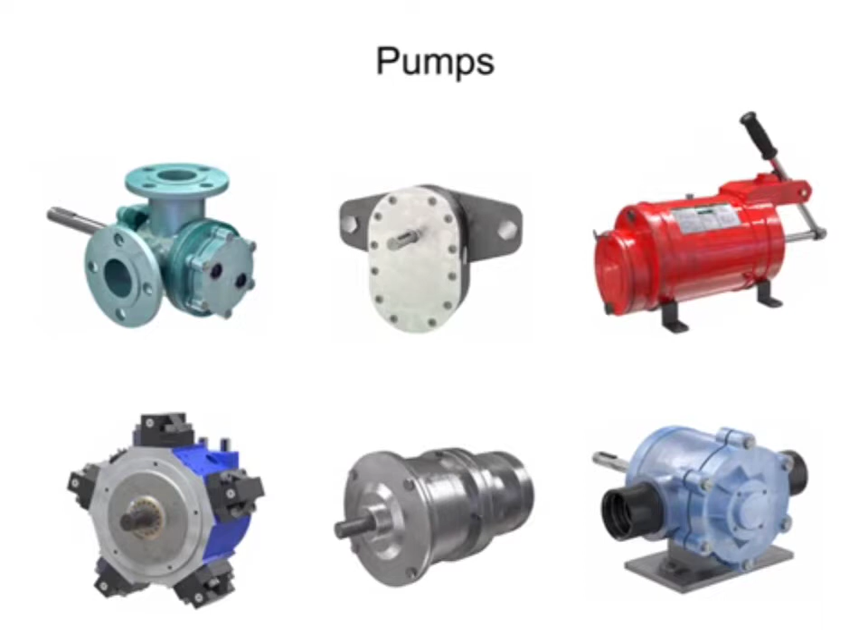Many different types of pumps exist to assist fluid movement in a variety of systems. An external gear pump uses two gears rotating against each other to provide fluid movement.

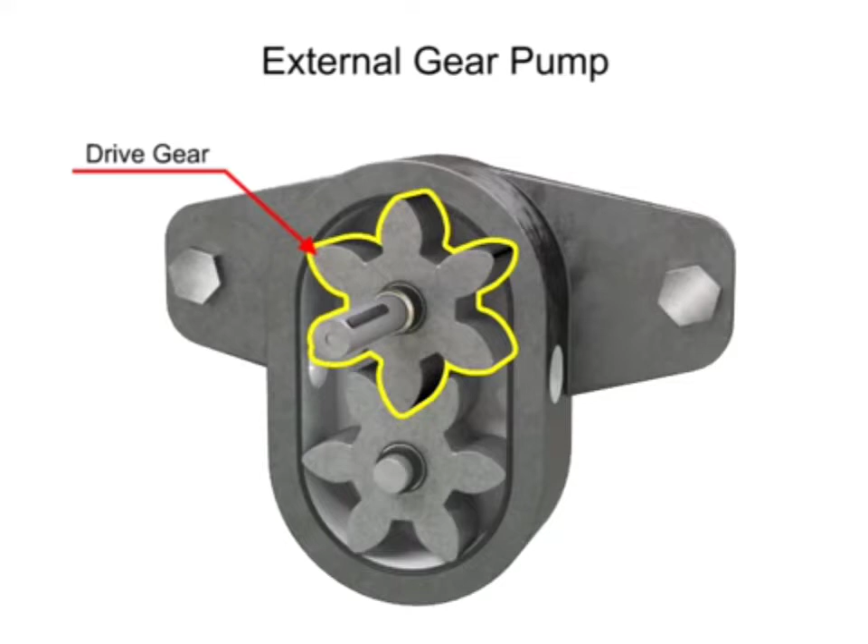One gear is driven by a motor connected to a shaft. This is called the drive gear because it is driven by a motor, and it in turn meshes with and drives the movement of the second gear.

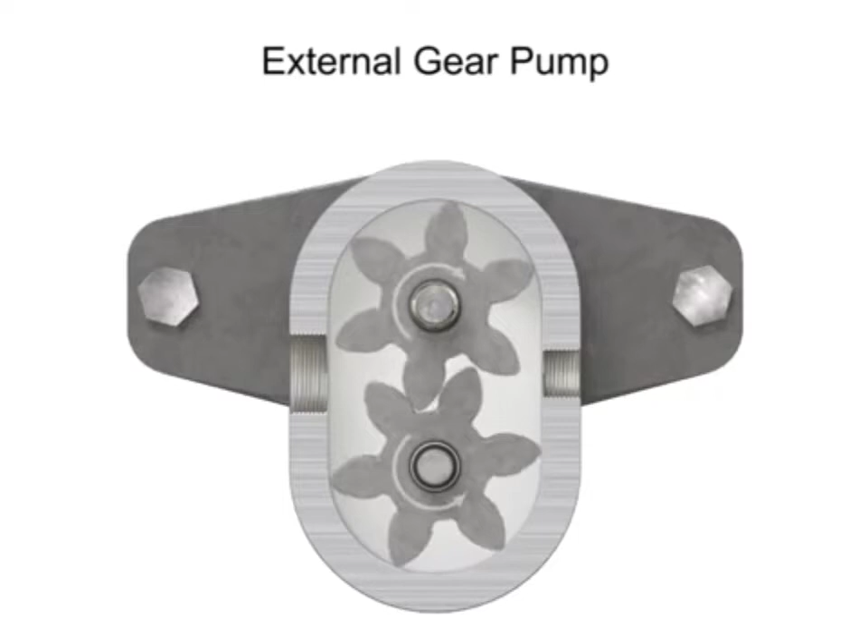As the gears rotate away from each other and come out of mesh, they create an expanding volume on the inlet side of the pump. This creates a vacuum at the inlet port, allowing fluid to flow into the pump. Then fluid flows into the cavities and is trapped by the gear teeth.

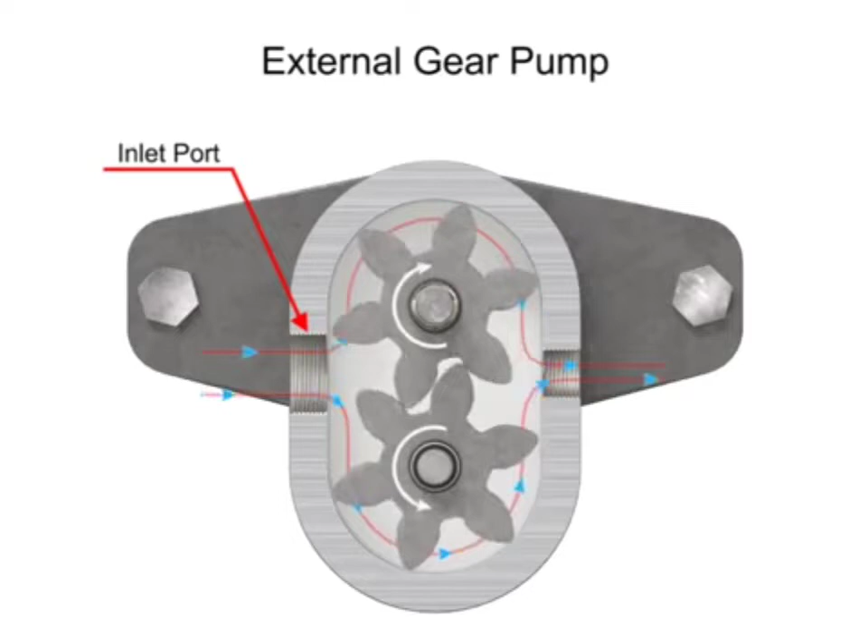As the gears rotate, a flow path is created around the outside of each one. Fluid trapped in the slots between teeth is carried around and discharged into the cavity with the outlet port. Meshing of the teeth in the center of the pump seals the outlet port from the inlet port. No fluid passes between the gears.

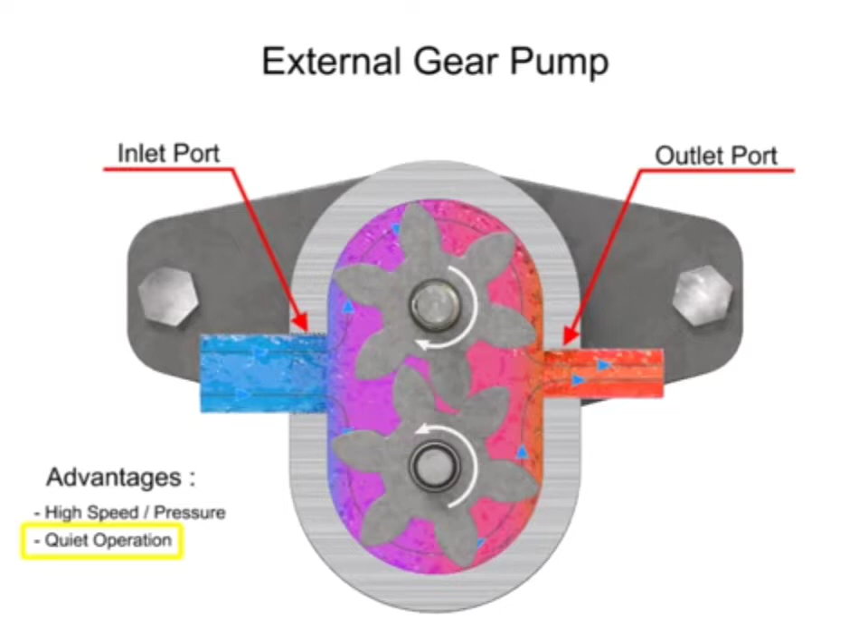The advantages of external gear pumps are their high speed and pressure, relatively quiet operation, and that their design accommodates a wide variety of materials. Disadvantages include bushings in the liquid area can become worn and that they have fixed end clearances.

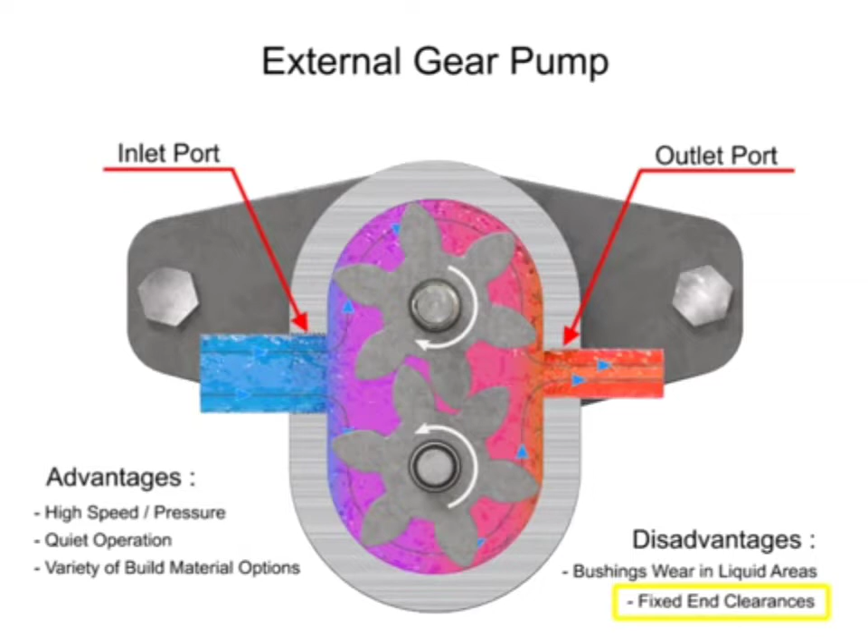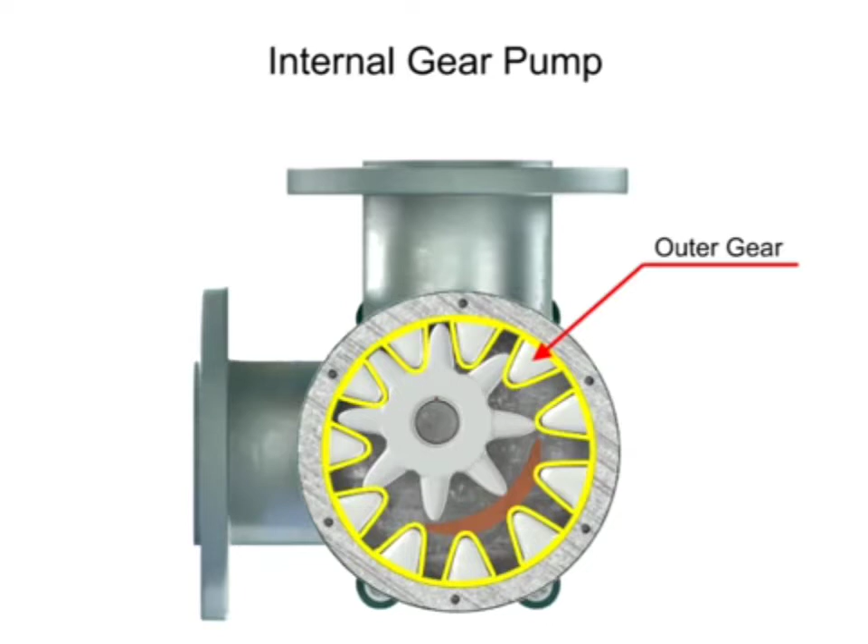Internal gear pumps are exceptionally versatile. This type of pump has one inner gear which is inside a second outer gear. The inner gear has a shaft driven by a motor and has teeth that protrude outward. The outer gear has teeth that protrude inward toward the center of the pump.

As the inner gear rotates, it meshes with and moves the outer gear. Liquid is trapped in the gear spaces and carried from the inlet to the discharge. A stationary crescent-shaped divider separates the intake and discharge portions of the fluid.

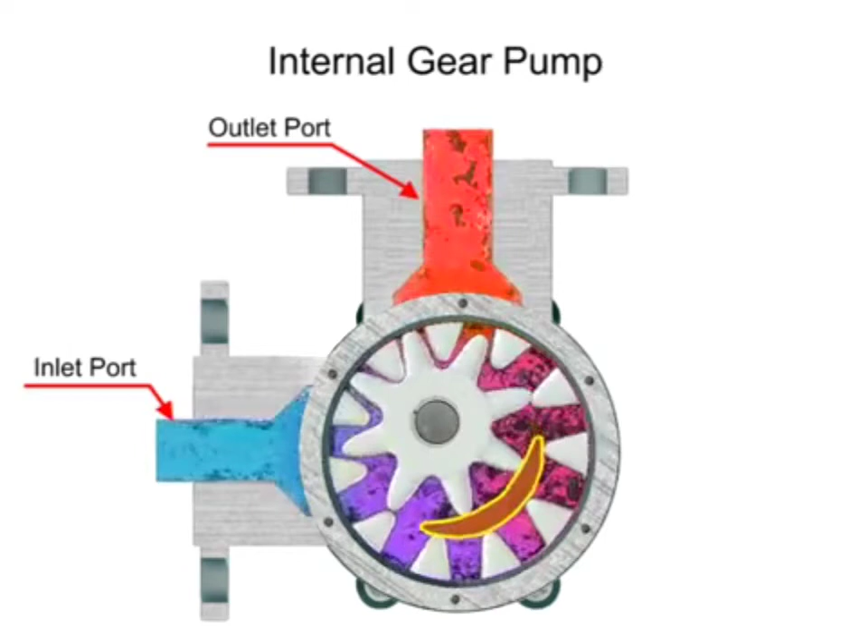Advantages of internal gear pumps are a smooth and almost pulseless flow, and slightly more horsepower for its size. Disadvantages are its higher cost, limited size range, low to moderate pressure ratings, and few sources of manufacture.

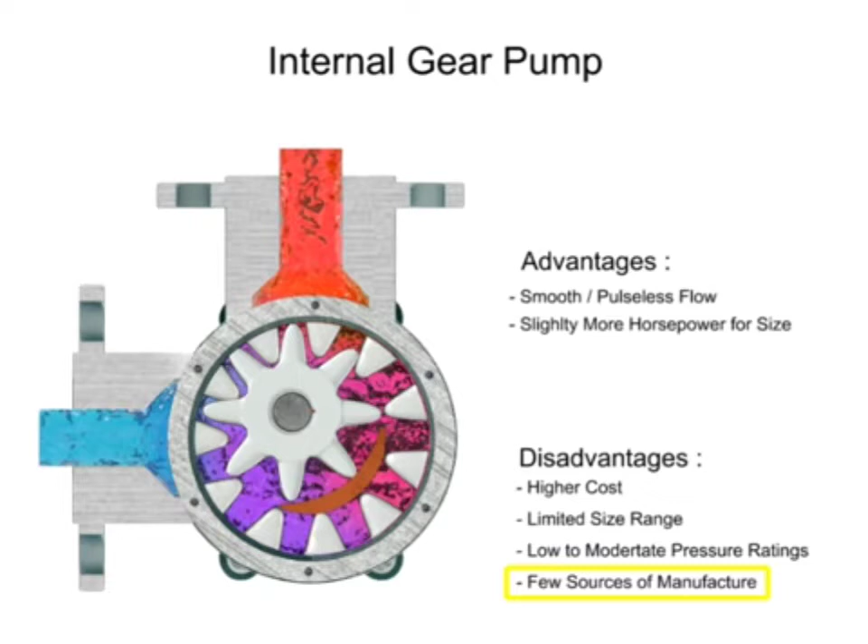A rotary vane pump is a positive displacement pump that consists of vanes mounted to a rotor. The vanes are on an off-center drive shaft.

As the shaft rotates, the variable length vanes slide in and out to maintain contact with the pump housing. The tension in the vanes is maintained by either springs or hydraulic pressure. As the vanes rotate, they create chambers of varying sizes within the pump.

Fluid enters at the largest chamber. As the vanes rotate and retract, the chambers get smaller, forcing fluid to exit through the discharge port.

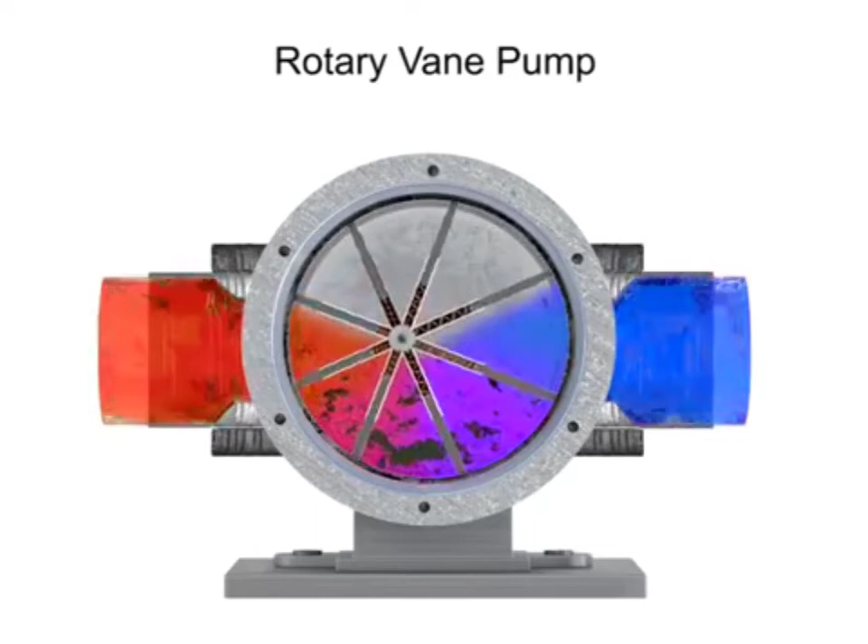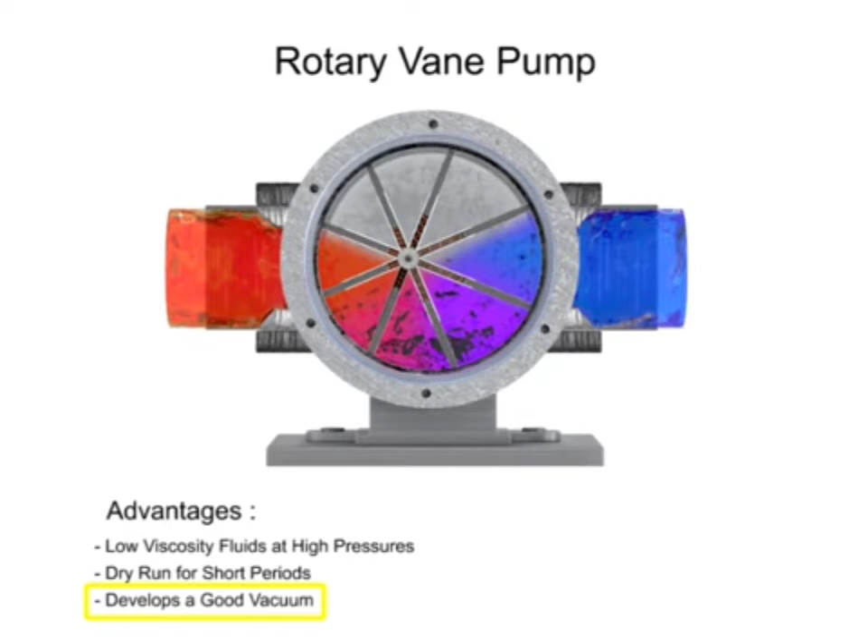The advantages of vane pumps are that they can handle low viscosity fluids at relatively higher pressures, can dry run for short periods, and develop a good vacuum. Their disadvantages include complexity and their unsuitability for both high pressure and high viscosity fluids.

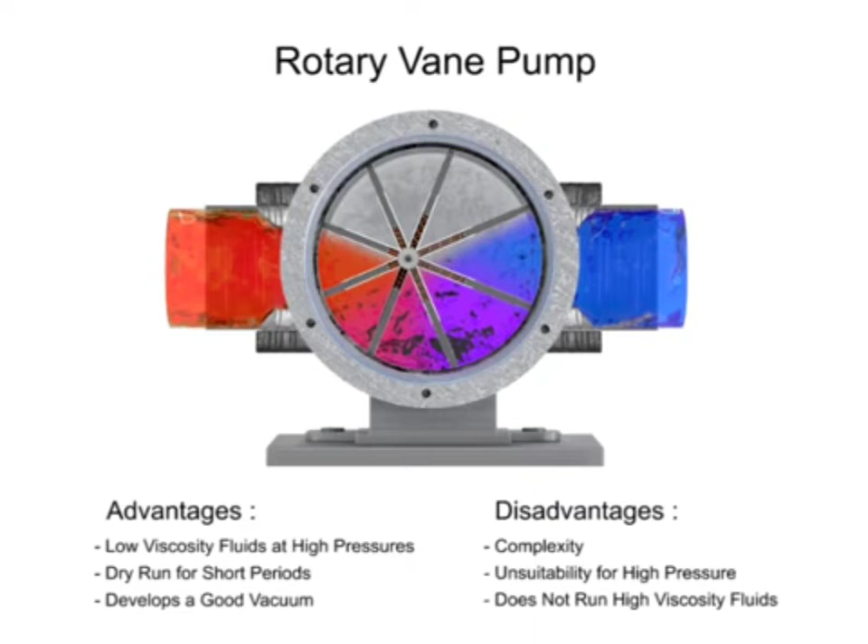Piston pumps come in many different forms. A swash plate is a device used to translate the motion of a rotating shaft into the reciprocating motion of a piston.

Swash plate piston pumps have a rotating shaft connected to a cylinder block containing pistons, which are pressed against a stationary swash plate that sits at an angle to the cylinder.

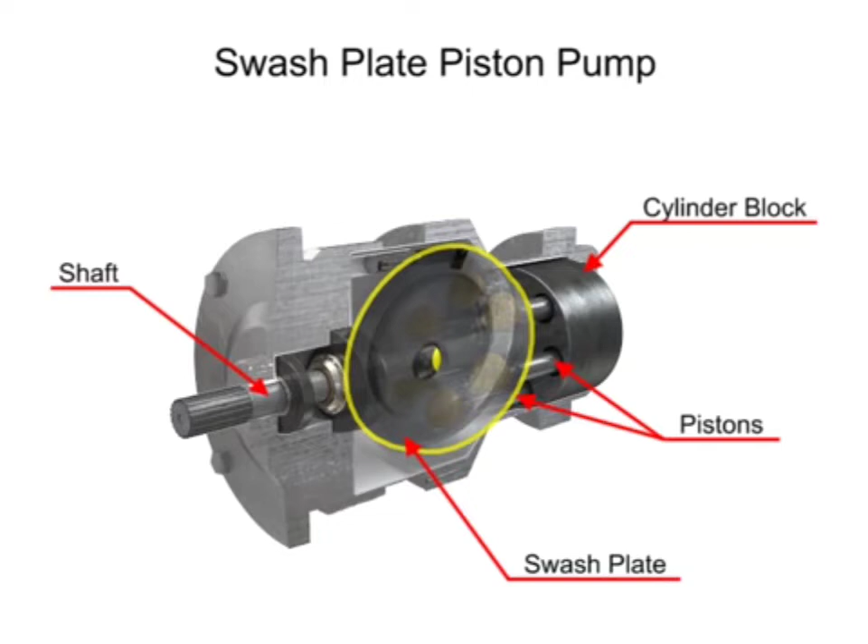As the shaft rotates, the pistons move against the swash plate, causing them to reciprocate within the piston block. The pistons create a vacuum that forces fluid in during half a revolution and expels fluid during the other half.

On the intake stroke, a spring ensures the pistons pull back and maintain contact with the swash plate, causing fluid to fill the empty cavity left behind.

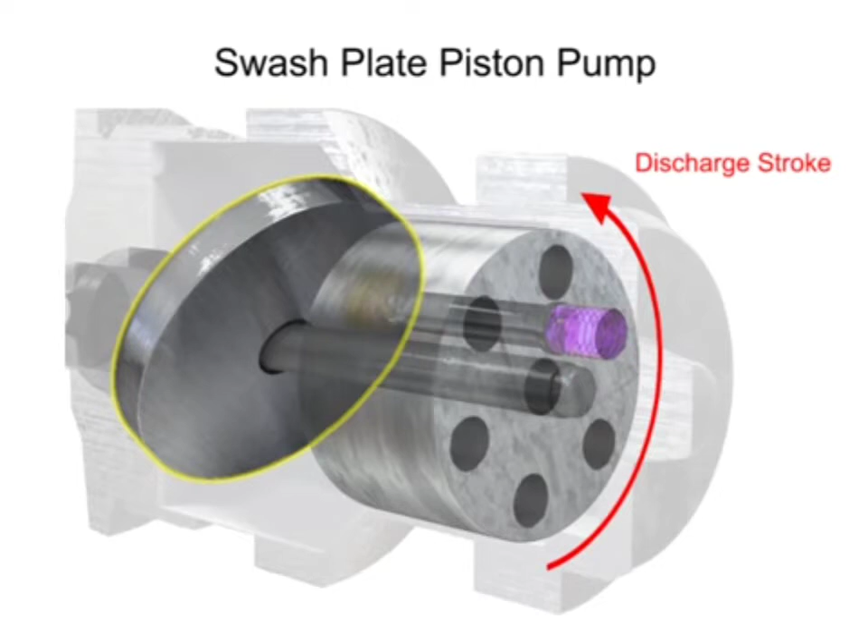On the discharge stroke, the angle of the swash plate forces the pistons back inside the piston block and discharges the fluid. The greater the slant on the swash plate, the further the pump pistons move and the more fluid they transfer.

Piston pumps, in general, are manufactured with closer internal fits than other pumps. This means that internal slippage can be less so that they operate with reasonable efficiency at pressures both too high or too low for the operation of other pumps.

Radial pumps are designed so the pistons stroke in a direction at right angles to the shaft. The pistons are arranged like wheel spokes around a cylinder block with an eccentric central cam mounted on a drive shaft.

As the shaft rotates, the cam moves towards the pistons, forcing them down into the cylinder block and discharging the fluid. As the cam moves away, springs help retract the piston and cause the intake stroke. Check valves ensure that fluid only enters the inlet ports and only exits the outlet ports.

Radial piston pumps have a low noise level, very high loads at low speeds, and high efficiency.

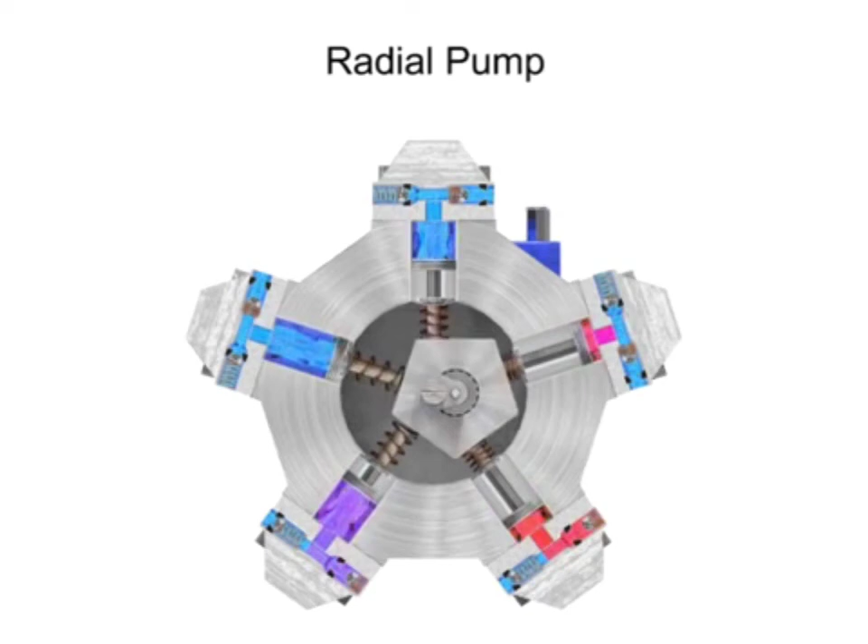Hand pumps are used when a source of power is not available or where the extra expense of a power pump isn't warranted. For example, they are used on shop presses and other portable equipment, serve as standby pumps, and serve as sources of emergency power.

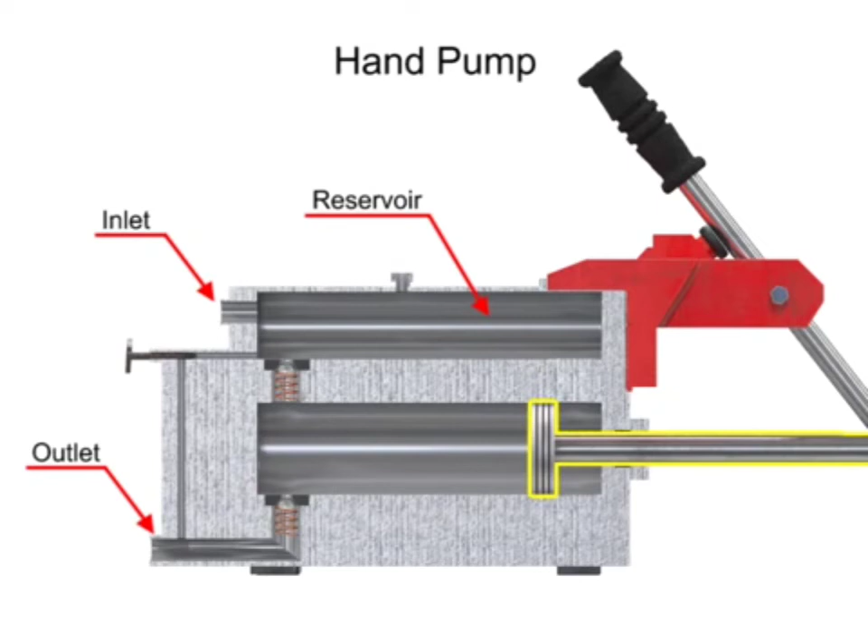Hand pumps are always of piston type and are usually constructed with a piston working between two check valves.

Double-acting hand pumps are more efficient, allowing fluid to both enter and discharge on both strokes of the piston. Moving the pump handle in either direction allows fluid to be drawn in from the reservoir and discharged via the outlet ports. Check valves in all locations prevent fluid backflow.